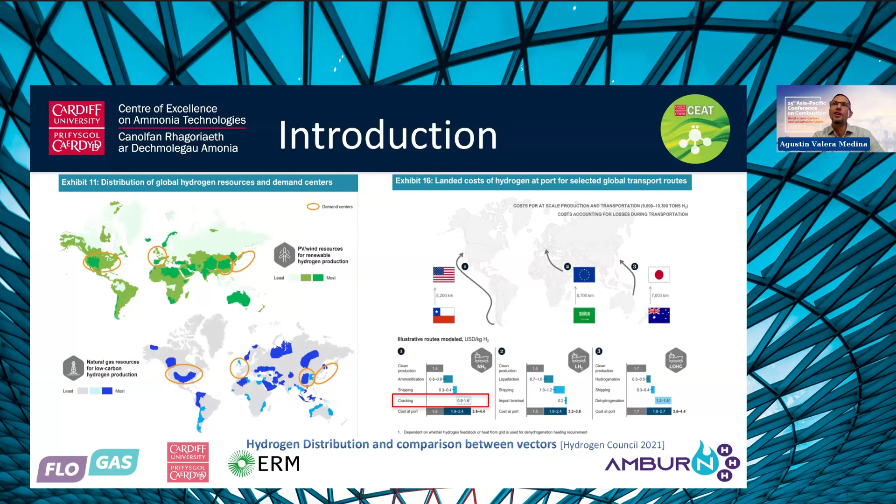Now, one of the parts that is very interesting is that if we remove from ammonia the part of cracking, then that becomes almost 2/3 of the cheapest option, that is liquefied hydrogen, therefore making ammonia the best solution for these processes. Another thing that is very interesting is that as part of this levelized cost of electricity that has been analyzed and promoted to see what is the most versatile, most economic solution, there are a lot of works now in the literature.

One of them, this one, produced by the University of Minnesota in 2020, where they evaluated the use of hydrogen or ammonia, or a combination of both, for all these different cities in the US. So depending on where these locations were, if they were close to an offshore wind facility, then it would be more on the scale of hydrogen deployment. Whereas if they were in the middle of the country where they have an ammonia pipeline, then ammonia would be the most suitable solution. But combining both gave, in all these scenarios, the lowest cost of electricity.

And that's because you can reduce the capex on both systems, the hydrogen producing units, and also the storage of ammonia. So therefore, it's a combination of both that is going to be the most convenient, probably preferred in the following years. So you can use directly hydrogen that is produced in fuel cells, cars, or other applications, whereas if you need to store any surplus, you can do it via ammonia and eventually use it directly, as I showed, avoiding the conversion back into hydrogen.

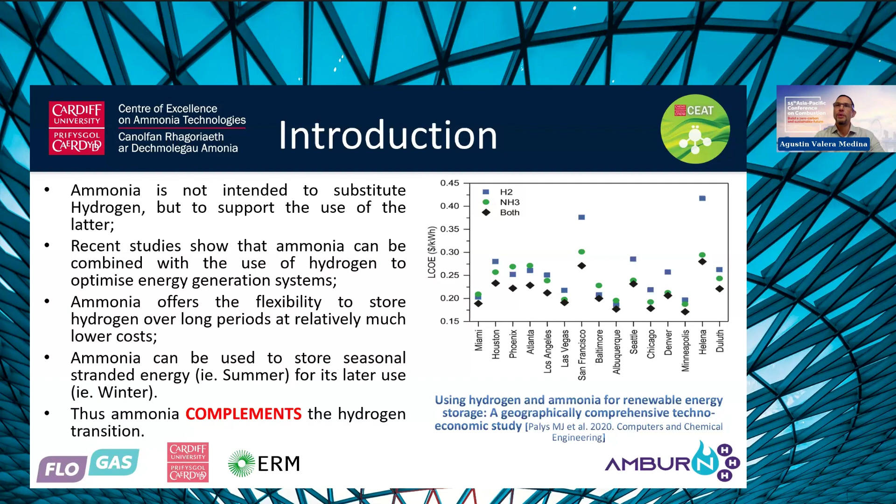One of the questions that I always get is, where are we going to get all this hydrogen and all this ammonia from? And this shows very nicely all the different technologies that are now in trend and that people are now looking at for the deployment of this ammonia. We are now running on generation 1, using steam methane reforming. We recover the hydrogen and then dump loads of CO2 into the atmosphere. That is now progressing into generation 2 type of systems with all this renewable energy, as mentioned in the previous slide, that eventually can be put into a Haber-Bosch system. That is the method of producing ammonia. We recover nitrogen from the atmosphere, put it together with the hydrogen, and therefore we get the final ammonia, and we don't produce as much CO2.

But then the third one is via electrochemical processes where we are going to combine water and nitrogen straight away, even air, producing the ammonia without having to go into high pressures, high temperatures. And once that happens, it means that everyone on the planet, anywhere, as long as you have air, water, and energy, will potentially be capable of producing their own ammonia, which again opens all the opportunities and can be the breakthrough of energy for the future.

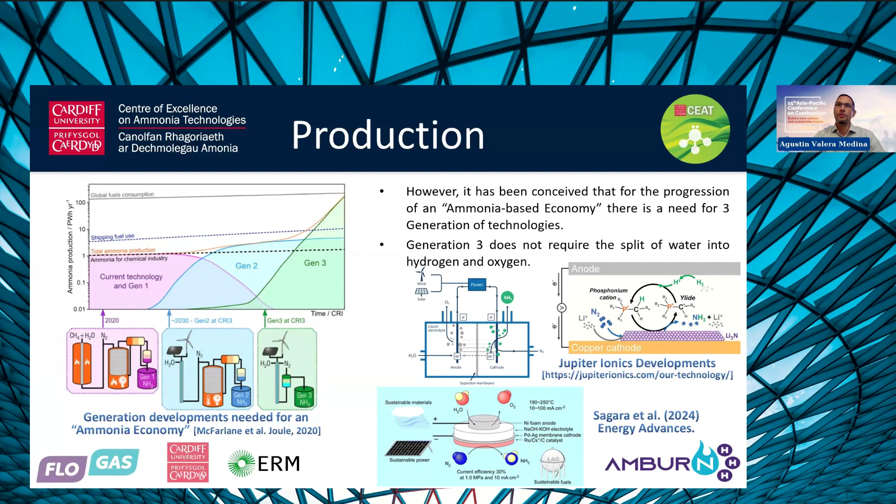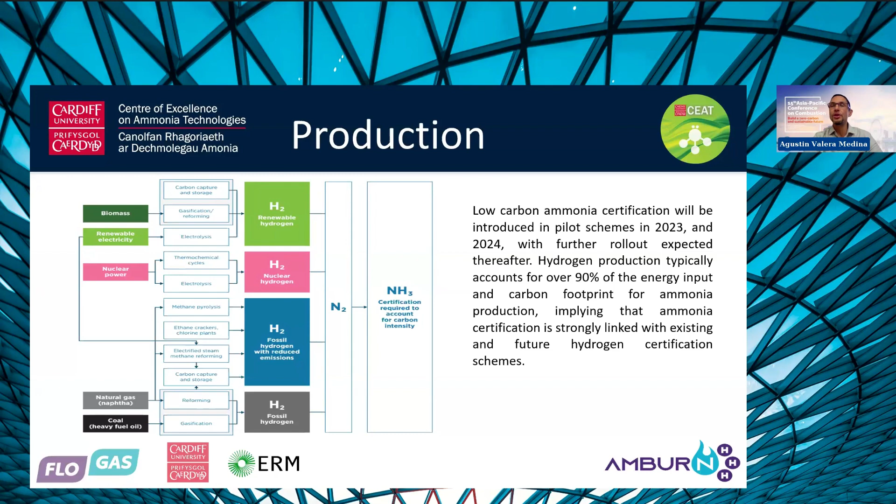So about that, we have the production of ammonia, all these different methods. We have talked about green, we have mentioned the use of steam methane reforming. We have the cases of steam methane reforming where we can sequester the CO2 and put it in the ground and produce what is called blue hydrogen, or even pink hydrogen or pink ammonia that comes from nuclear reactions. So all this is going to be part of the hydrogen future, and obviously the production of ammonia that, as shown, can be the method of deploying all this amount of energy.

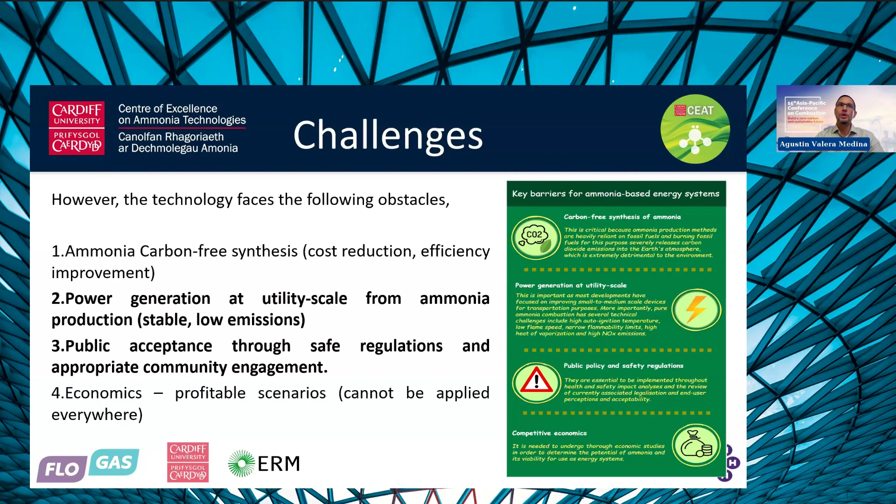However, when it comes to the use of ammonia as an energy vector, we have several restrictions. We have spotted over the years 4 of them: first, production without carbon emissions. We need cost reduction and efficiency improvements in those types of systems; power generation at utility scale and also heat production with stable low emissions; public acceptance and safe regulations that are required everywhere, because we don't have any when it comes to the use of the molecule as a fuel. And finally, the economics that obviously need to be profitable. And with that, one of the areas that we have pursued is power generation, heat generation using ammonia.

This shows some of the opportunities and places where we can spot the use of this vector. And as mentioned before, and done by the Hydrogen Council, ammonia can be deployed in city gate terminals, locations close to the ports, and then eventually converted into hydrogen to then be fed into cities or the natural gas grid.

Now, another area that we have identified, that we believe is going to be the one where ammonia is going to rule, is rural locations. And the reason for that is that these locations are off-grid. They don't have the same infrastructure for electrical connectivity. The delivery of hydrogen via long or massive pipelines is not economic. They are already using fuels that can store some of this energy, for example, propane, butane, etc.

And there's another component that is the public perception. People are used to the smell of manure. So as long as the concentrations of ammonia are not high enough, then people, smelling that chemical, know what it smells like. So that's the reason rural locations spread all across the world can be the location where to do it.

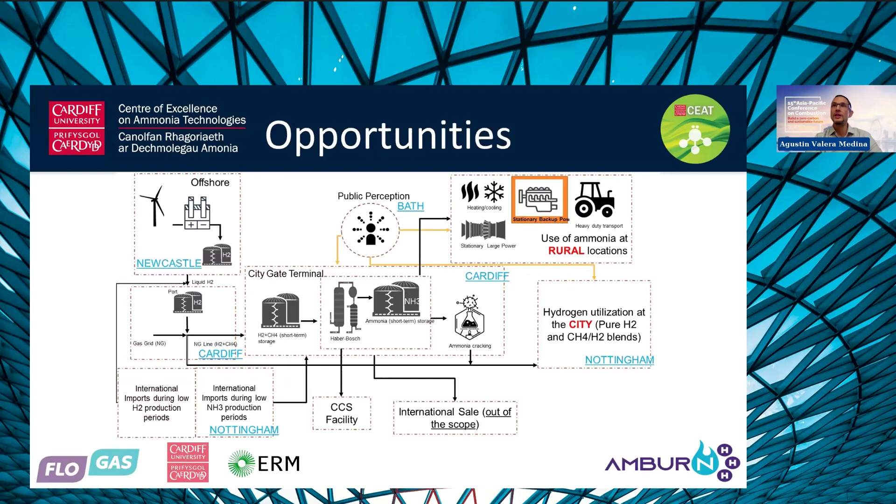And when it comes to, for example, what Gina mentioned, stationary large power, these types of units are in the countryside. So again, it just opens the opportunities for heating, cooling, stationary power, and then heavy duty transport using the chemical directly. So along those lines, we have been doing this project in collaboration with Flogas and ERM. And initially, we conducted some techno-economic analysis.

The results were very promising, because they showed, first of all, in terms of emissions, having green ammonia will bring down the emissions of CO2 drastically compared to the current fuel that they're using at the moment in these locations, propane. So as you can imagine, the amount of CO2 saved is a lot, around 170 to 200 kilograms of CO2 that we will be saving by using ammonia in locations that are currently operating on propane gas.

Now, one of the things that is very interesting is that when compared to liquid hydrogen in these locations, ammonia was even better in terms of the economics. And the reason for that is that instead of bringing 3, 4 or 5 tanks of hydrogen that will be required to power these locations, we would bring only 1.5 to 2 of ammonia because of the energy density of ammonia itself. So therefore, in terms of replacement of LPG, this was the best solution.

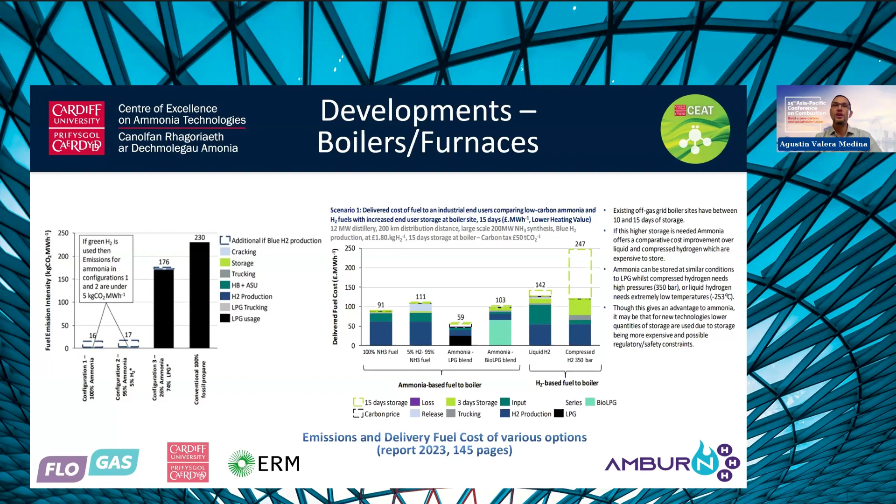LPG also shares a lot of commonalities and features with ammonia. It can be stored at -33 degrees compared to -42. The components for evaporators, stainless steel, are made for LPG and can be used as well for ammonia. Delivery lines, etc., all fit in line with the use of ammonia and replacement of LPG. So with that, we are now commissioning a large system.

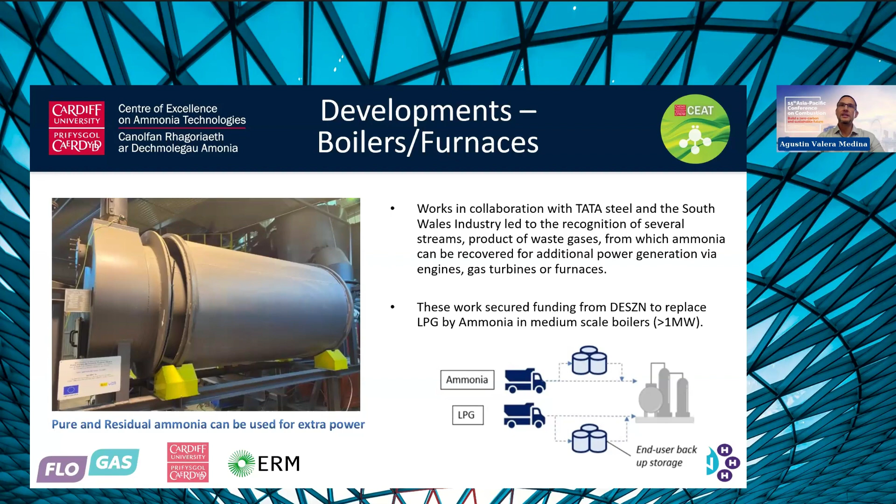It is knowledge that we have gained over the years working with Tata Steel, the South Wales industry, and Siemens. And with that, we obtained a Department for Energy Security and Net Zero proposal, and finally a project to convert a 1 megawatt boiler to ammonia fueling. So we have been working on several concepts: fuel stratification, temperature control, integration of systems, cracking of ammonia, hydrogen sieving, artificial intelligence, advanced computational design, bespoke storage and delivery, etc., to reach that 1 megawatt.

And with that, what we are now planning is we got new patents, novel feeding systems, control strategies, and cracking devices to provide us with large academic and commercial dissemination for Flo Gas. It is envisioned that if the systems operate as we are planning, this can then generate around 700 million of revenue for the company in the next 15 years, with the production of around 70 direct jobs and the creation of novel ISO standards.

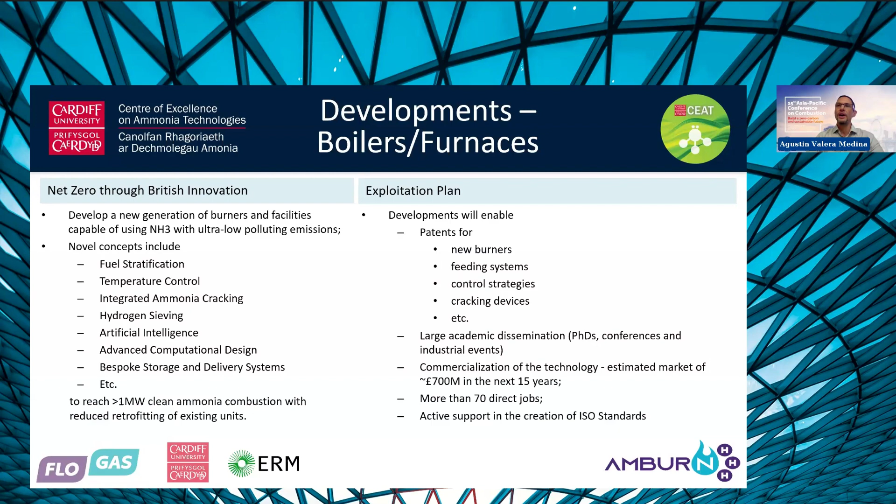So what we obtained in terms of combustion, as part of our first phase analysis, is a burner design capable of minimizing NOx emissions to almost negligible values. Now, as those already operating and using ammonia might know, there's a trade-off between some parts per million of ammonia versus nitrogen oxides. In this particular component, the trade-off is quite good. We are below around 20 parts per million with zero nitrogen oxides, which is fantastic, at around 15 to 20 kilowatts power.

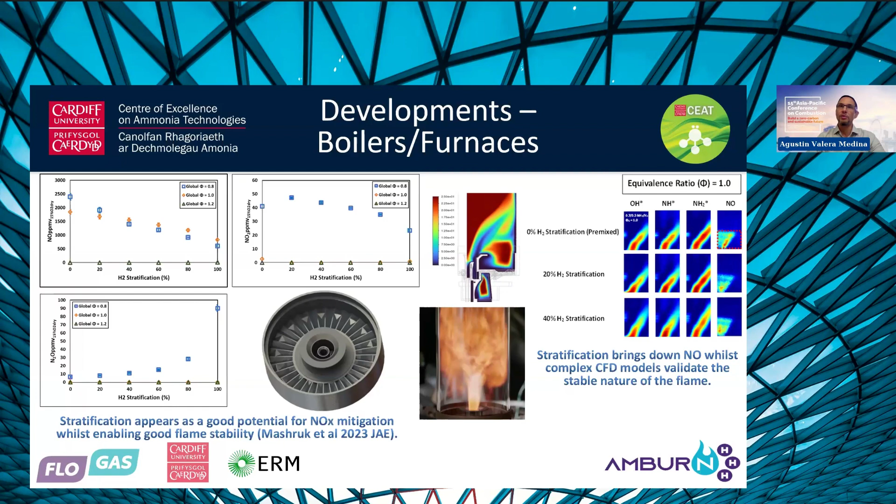And this is because we are using a method of stratification of the hydrogen that we obtain via cracking and the ammonia that we're injecting as a premix part of the flame. Now, that first phase has delivered our second phase, which is in line with the 1 megawatt power unit. And as you can see, we are now obtaining results in terms of crackers that we have in situ.

And we are now testing different materials, ruthenium, nickel base, to then see what are the properties at different flow rates in situ and online with what is our flame and heating process of thermal crackers that we're using and improving as we go along.

Also, we are doing thermoacoustic analysis on the different flame patterns that we got, testing with pure blends of ammonia-hydrogen and blends that have now cracked ammonia. That includes the nitrogen itself. As you can see here from the thermoacoustics, they change. They are very different between themselves, and something that, again, is just prompting a lot of interest in terms of research we're doing. Some other components, radiation, that is at the top as well.

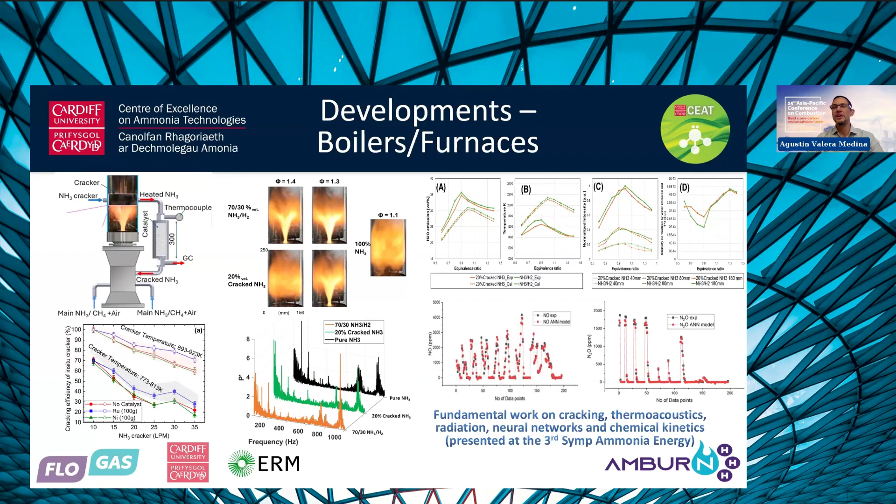We're evaluating how radiation with the different blends is actually acting on these burners. And with that, we're integrating artificial intelligence to then determine the new reaction mechanisms and new methods to then control our feeding systems. So all that is part of what is our fundamentals of this type of program. All is going to be presented in the third symposium on ammonia energy for those that are going.

Now, when it comes to the commissioning of the system, what we got is all these units is a 500 kilowatts power unit that eventually is going to be replaced by a boiler of 1 megawatt. And we got large drums of half a ton of ammonia, evaporators that can deliver those conditions of half a megawatt power, propane that is used for the transition of the flame, with a control system that is fully dedicated to then use these fuels. The way that we are doing, as I mentioned before, is artificial intelligence based.

So we are looking into the chemiluminescence of the flames to then determine equivalence ratios and power ratios of the flames that we're using. So that way we're feeding back and then finally controlling what we see and what we obtain, and finally NOx that will be important to address as well.

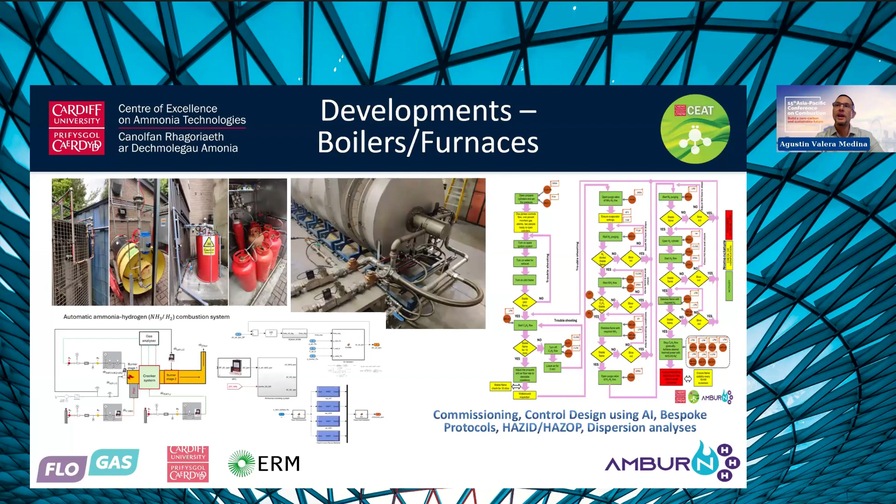With that, we have done the commissioning, control systems, artificial intelligence, bespoke protocols, analysis of hazards, and also operability studies and dispersion analysis. And with that, we have done as well advanced modeling to improve what is the reactor and the burner itself. It's interesting because we have done around 200, 250 different models in collaboration with the University of Poznan.

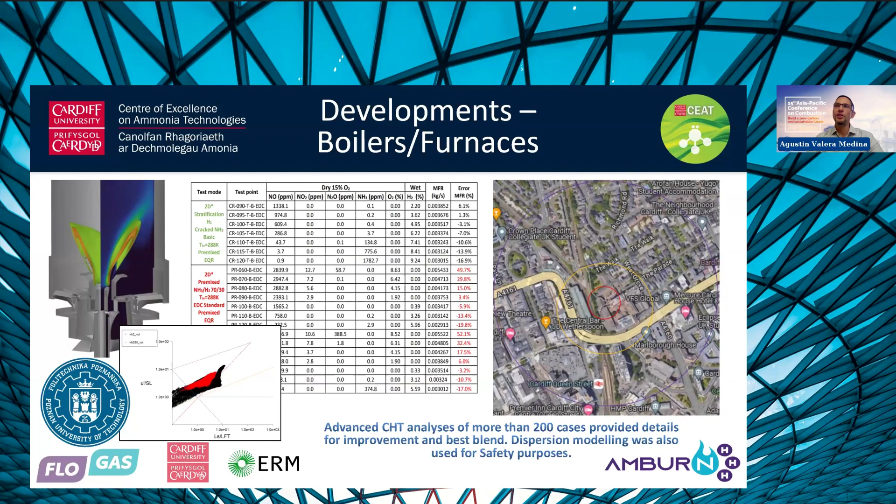And with that, some dispersion analysis that shows, for example, in this case, that if that drum that I showed you, half a ton, suddenly has a massive spill and all the ammonia is just spread everywhere, it will then reach around a 250, 300 meters radius of the center of Cardiff, which means again we'll have to evacuate all the town, which obviously we don't want, but that's what you get when you're using a component like ammonia. Now there are a lot of risks associated with that. With that as well comes a method to then mitigate these issues, but this has been part of the program.

And with that, we got now a HAZOP dispersion analysis. We have done the 300 kilowatts facility Cardiff commissioning, and we have run our tests with CFD modeling and acquisition of new measuring systems. As we are now progressing, we are doing 300 to 500 kilowatt tests just these days, developing bespoke ammonia delivery units, novel fueling controls, and we're working now on the potential of having a technical specification for this type of units with evaluation of novel methods for emissions control.

And what we are planning now in the next 2 months is to then test at 1 megawatt, technical specifications that can be put forward to the ISO committees, and demonstrate the unit for 4 weeks of continuous operation in a final user facility. And all that wouldn't have been possible without the support from DESNZ that gave us a total funding of around 3.5 million pounds to conduct all this.

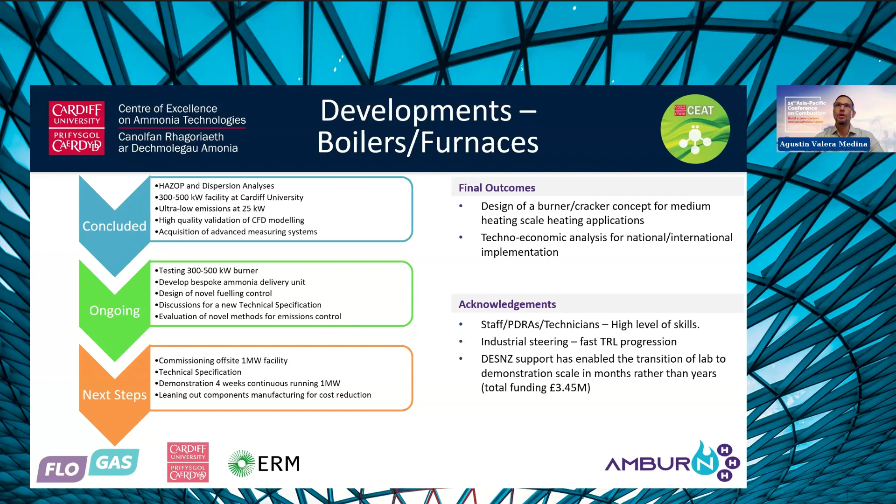And that's because once you have some spread or leak of ammonia, the time that it takes to start converting back into gas is massive. Plus, again, it is very highly detectable. So in these types of scenarios, it could be even better than the LPG cases, also because of its explosivity, which is massive in the case of LPG.

Similarly, some other studies done by the US government show that fatalities when it comes to ammonia are minimal over the last 15 years. Now, obviously, this is when comparing refrigerants or fertilizers, not fueling. That changes the name of the game.

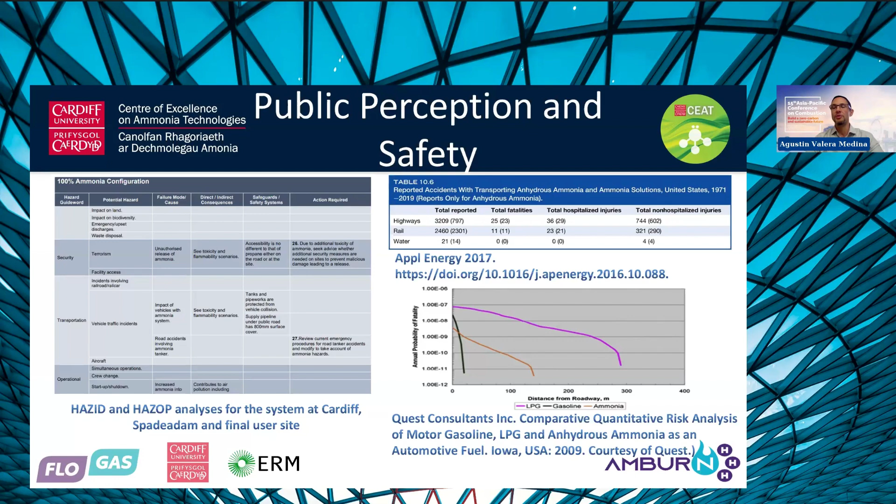So therefore, we need more research in this area. So the conclusion: ammonia can be used for power purposes via combustion. Green ammonia produced from renewable energies is capable of storing some of this stranded energy. Rural locations are a preferred option for the chemical for direct fueling applications.

Fundamental analysis shows stable regimes, whilst the potential of in situ cracking improves combustion features, and robust developing complex integration and advanced modeling have served us to then establish these facilities. Now, one of the things that I would like to raise is that during ASPACC, we'll present the combustion results of all these facilities. So you will be able to see 1 megawatt power fuel burning ammonia-hydrogen flames via cracking methods.

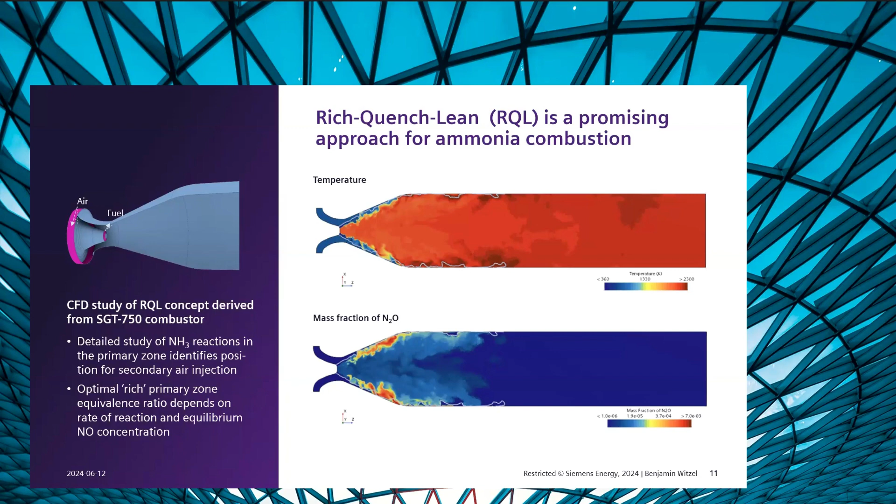And Agustin as well. Hi, Agustin. My question to you is regarding your super low levels of NOx there, 20 ppm. I was just wondering what brought that about? Was it burner design, or a combination of burner design and fuel blend? And the follow-up question is, since we're talking about N2O as well, what is the level of N2O? Thank you very much, Asad. Hope to see you as well in Singapore. So yes, it is a combination of both.

We did some analysis again over the past and some of the initial work with Siemens on trying to then find what would be the most stable, lowest emission blend that we could get. And that's when we came up with that 70-30 blend that you've seen there. And that's the one that is giving us the best profiles, lower instabilities, better performance, etc.

So with that, we start looking into the improvement of the geometry. The geometry would allow us to increase the residence time of some of the species, especially the NO, as we're increasing the interaction with NH2. And that would then lead to the production of more nitrogen and water content.

When it comes to N2O, because we're running slightly rich, around 1.1 equivalence ratio, the values are 0. It's the unburned ammonia that we still have there. But because we are increasing that residence time, at the post-combustion zone it is being reduced. So both the NO and the unburned ammonia, they reduce each other.

Nice, nice. Good work. Thank you. Thanks to both. Thanks, Asad, for your questions. Thanks. Any other questions? If you have any questions, you can submit through Q&A. Okay.